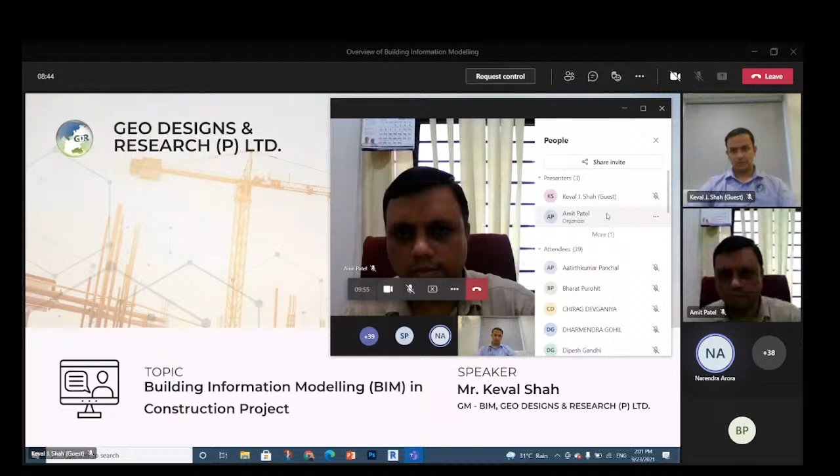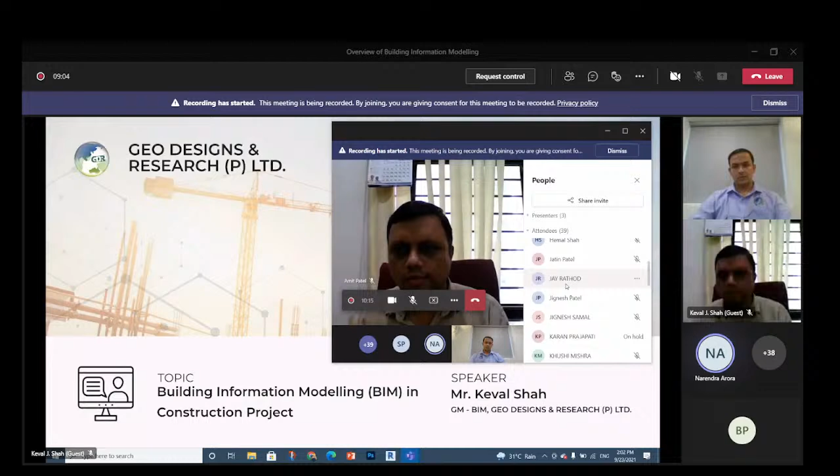This particular branch, building information modelling, is a newer branch. We hardly study it in our course, but it is being implemented in the field. In this world of computers, it is important to control the system using software. Till now we were making software to come out with the outcome and work on it, whereas now it will be more on computer working itself, that we are not supposed to take output, but we simply feed input, and then the computer will carry out its own work. This will definitely be an eye-opener for many of our students. They must understand what BIM is. BIM is basically divided into... earlier it was more related to certain activities, now it is being applied even during construction activities also. More about this will be talked about by the expert, and I hand over this to him.

Please continue, please. Thank you, Arora sir, for giving me this opportunity. Yes Keval, please, to give this knowledge of disruptive technology.

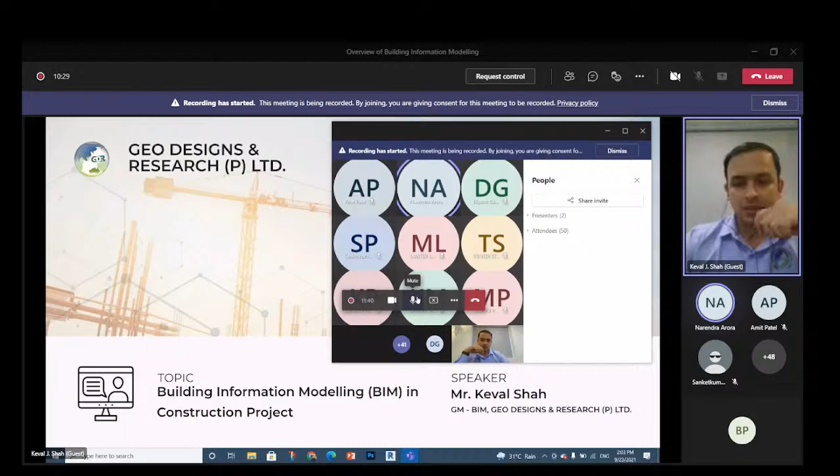See, this technology is called disruptive technology, and the meaning of... Keval, you need to be a bit loud, you need to keep your microphone closer to your face. Is it audible now? Now it's okay, it's okay.

This technology is called disruptive technology. I hope you can see the screen. What is the meaning of disruptive? A disruptive technology is a technology in which the previous technology will get vanished or disrupted. So what is something special inside this type of technology that we're going to see, study, and analyze in very simple language? There will be no heavy vocabulary or dictionary words thrown by an expert, but this will be much more of a discussion where you 40 plus students and your faculty could directly interact with me. If you have any doubts or queries, you can post them to me after the lecture or during the lecture. So let us start with what is BIM, and let us see some background of it.

Yes, the future has arrived and software is eating the world. How can we say that software is eating the world? Let us take an example of the biggest hotel chain. Is it a hotel? No, it's not a hotel, but it's a software company, that is Airbnb. If you see an example of the biggest taxi company, no, it's not a driver, they are not drivers, they are software manufacturers. Same way, we have many examples available nowadays in which software is running the world. So now the same thing is coming up in our field.

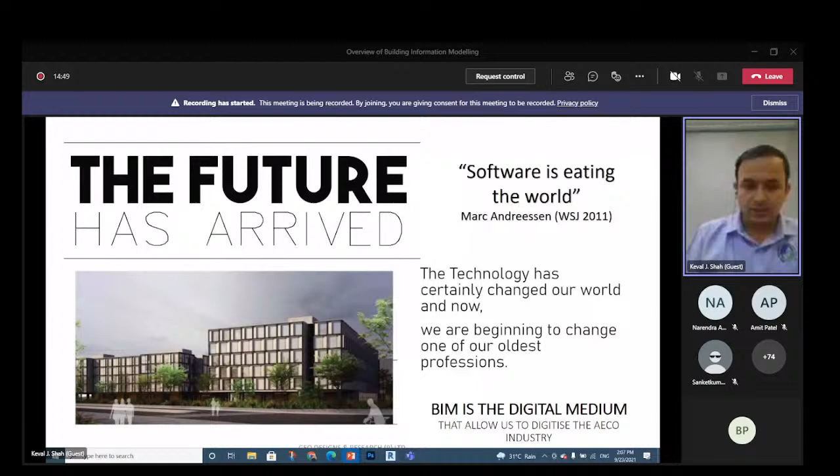Let's go ahead. What are the challenges in large construction, and why am I talking about only large construction? BIM is mostly useful for large construction - but this is again a myth. We can definitely use this for smaller projects also. There's a huge myth that BIM is useful only for larger projects, but that's not true. BIM can be useful for all types of projects, but the benefits from BIM will be larger for large scale projects.

So let us consider a stadium or large construction. What happens here? These projects are technologically complex and logistically demanding. How? Technologically complex means we now have different collaborators all around the world. Suppose the structure design is from India, the architect is somewhere from London, the MEP consultant is from a local party, and the project is going on somewhere in South Africa. It's very difficult to get everyone on one table.

And the climates - now climates are much more undulating, fluctuating up and down, so we require more mechanical thrust to maintain the temperature inside the building. These things are making buildings technologically complex and logistically demanding.

Also, our project schedules are getting shorter day by day. Suppose construction that we built 10 or 20 years back required 6 years - now it only requires 2 to 3 years, because the market is so volatile. Steel rate and cement rate today may not be the same after 1 week or 1 year. So now our project schedules are reducing day by day.

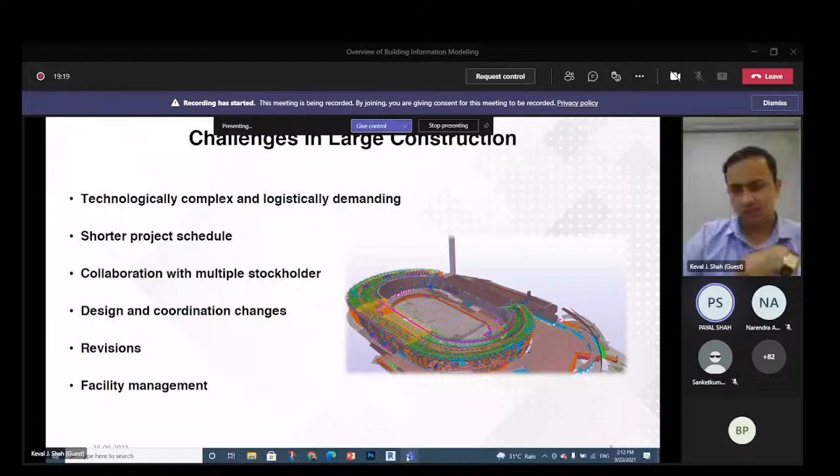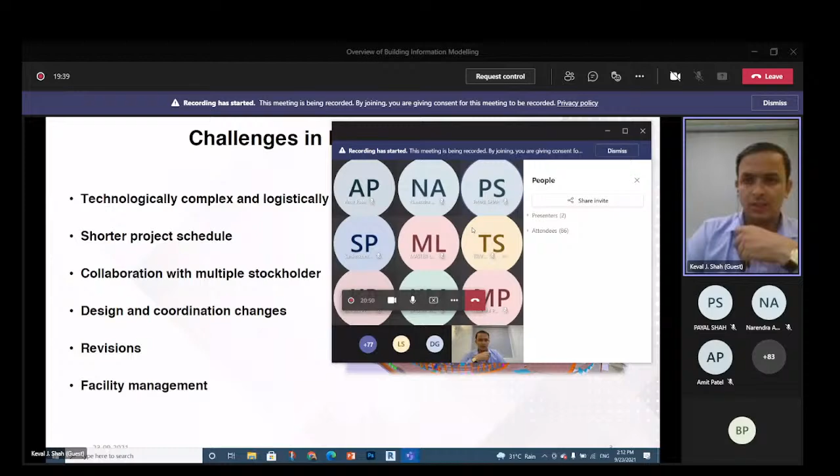So let us go forward. Am I audible again? Yes sir, audible. Yes sir.

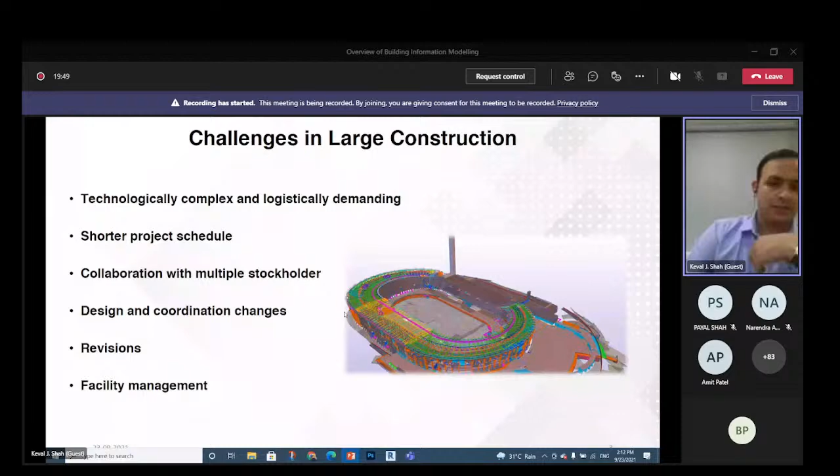So this is one of our projects that we have done, and this is our model. It's a G+12 structure, and we have done structural analysis, structural design, architectural part, green building part, MEP consultancy. We are the MEP consultant and the BIM consultant also.

If you see BIM, building information modeling and building information management are two different things. The building model has to play a shorter part, whereas the information inside it has to play a larger part. Why? Because creating a building model is very easy, but having information inside it, an information-enriched model, that information has value.

We have ISO 19650, with part 1 and part 2, for deliverables of information. The work has been done by the contractor, the EPC contractor. Now each and every asset—when I say asset, suppose you have a pump installed inside your building—when you are handing over the project to the client, we need to give each and every piece of information. I have just given one simple example of a pump.

So what type of information will be required by the client to run the project? Suppose there is a pump, we require the manufacturer, the date of purchase, invoice number, the price, and the maintenance criteria. Suppose we need to align the coupling or something every 3 months. These are called facility management parameters that we have to exchange between both parties.

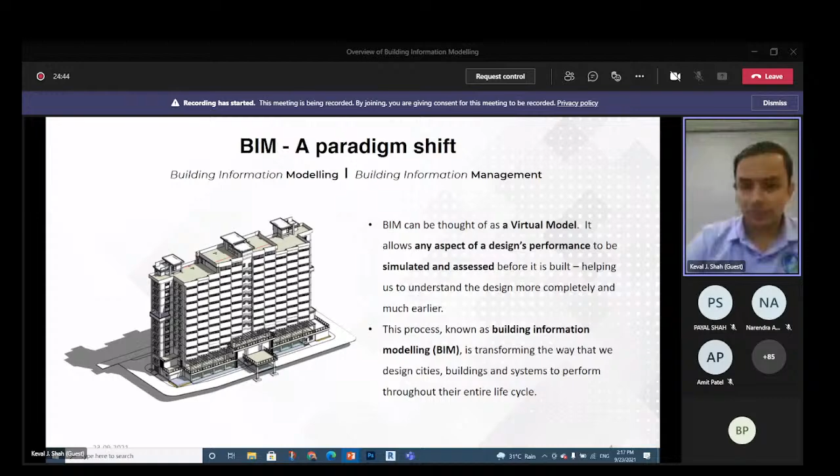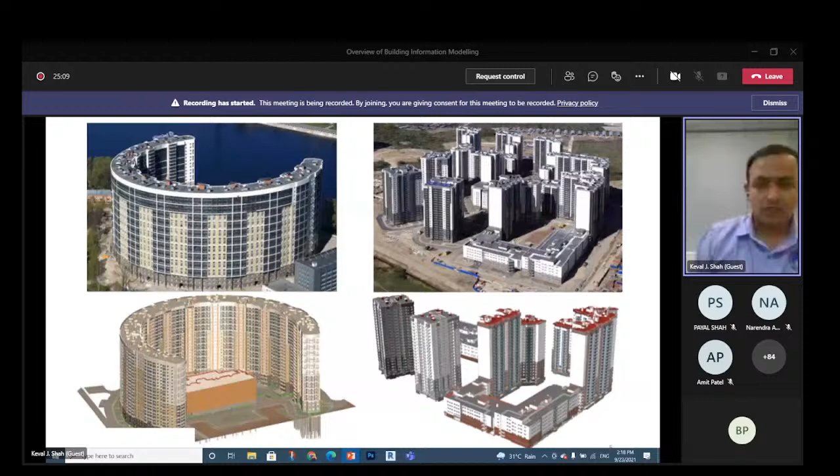This is really an intelligent model. Why intelligent model? Let us design, build, and operate. What I mean by BIM in design is that we create 3 different types of models - one structural model, one architectural model, one MEP model - and these models are clubbed together. Clashes will be removed at a very early stage.

And one of the most important parts - documents. It means our schedule, our quantities. Everything will be extracted from a BIM model. We are not going to create them separately.

I will show you many examples in which I have not even drawn one single line, but I have created just a model. Once the model is finalized by all the parties - structure designer, MEP designer - if everyone is okay with the design, after that we take out the documents.

So what's the difference between the current design process and the BIM design process? We're going to see that next. The same drawings, or the same model, will be useful in build.

When I say fabrication, it means what? Suppose the pipe I've shown in the BIM model is 100 meters or 100 feet long, but in actual we don't find a 100 feet long pipe. So we need to use the actual dimensions of a product. We can replace our model with an LOD 300 model, or a model with the actual asset available in the market. So what happens - we are doing digital fabrication.

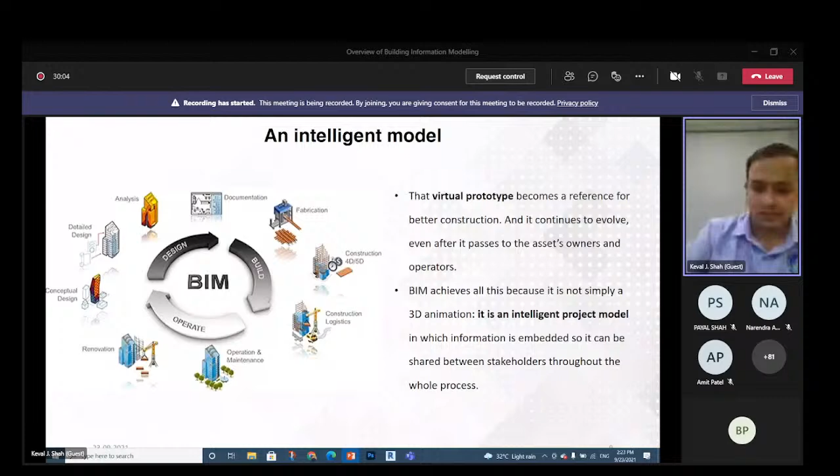So in the BIM design process, as a disruptive technology, the first model you can say is a massing model or conceptual model. What it shows is whenever we are going with any architect, they used to sketch. Suppose you are giving your vision to the architect, what they do is give some type of shape to your imagination or vision. So that part is also now possible inside this type of model. That is called a conceptual massing model.

And the important part is that in the same model you can do your detailing part, so it becomes our architectural model. Currently what happens is once the architect draws, after that a 3D artist will work in SketchUp, provided and developed by Trimble, Tekla.

What happens in SketchUp? They used to sketch it and give some virtual shape. And that virtual shape will be used by a draftsman to create a floor plan, elevation and section. So what happens is your model is going to pass through 2 to 3 hands, 2 to 3 tables. What happens is your actual geometry and your final geometry will not be consistent. There will be some errors.

So what happens here, in the same model, once you model it and the same model is given to the architect, in the same model you will provide your detailing. So what happens is your geometry will remain consistent, and you can take out the analytical model from this type of BIM model.

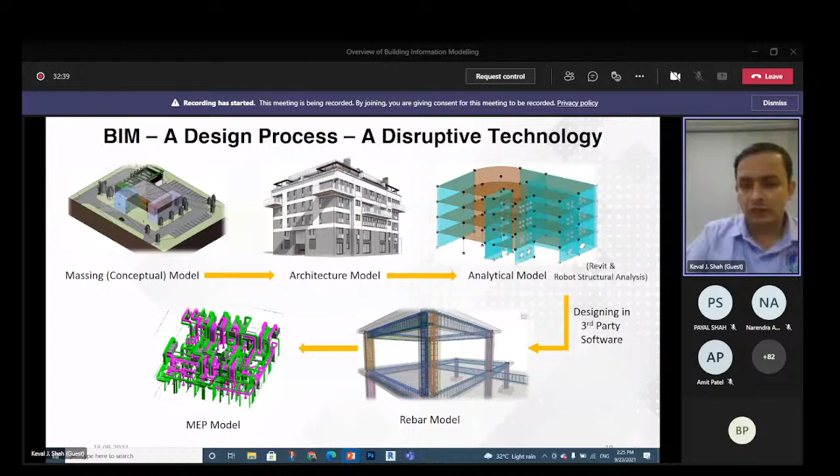Integrated project delivery is a very important part to study. We will look at what happens currently in ordinary design process versus BIM design process, so you understand how buildings are designed now and how BIM design can happen.

First of all, we need to understand what is integrated project delivery. Integrating whom? We are integrating people, integrating systems, integrating business structure and practices. We are bringing the whole ecosystem to one place.

Let us take an ordinary design process. The whole project starts from the architect. In the market, based on how building designs happen, the architect has created a certain number of drawings - elevation, section, plan, everything is created. 3D views are created, but not in BIM, just an ordinary model.

The architect sends all the drawings to the structure designer. So what does the structure designer do? They put column and beam locations, finalize them with the architect, and after that they design the building. Then the structure designer gives that drawing to MEP.

So let us say the architect has created 50 drawings, structure has created 50 drawings, MEP is going to create some 20-30 drawings. All the drawings are created, ready the same way for other consultants, and they are ready with the quantity estimation and all that part.

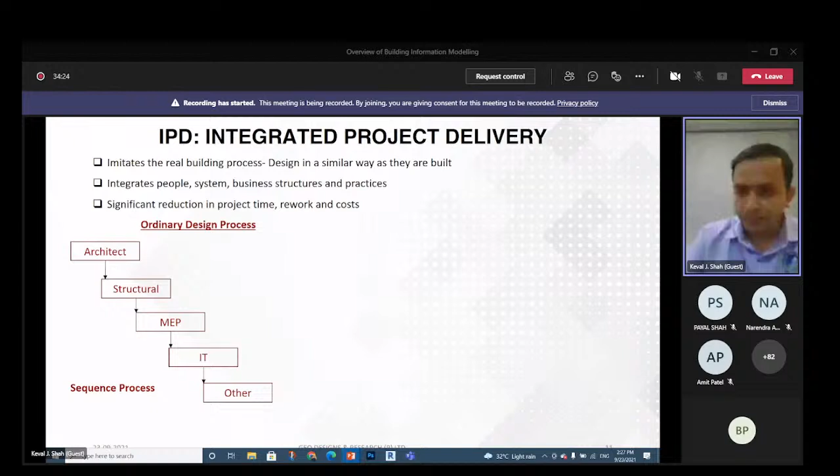And what happens? There is one revision that came. Revision, as I said, is a part and parcel of the project. There will always be revisions. No project should be created without any kind of revisions.

If one revision comes, that revision will affect all the drawings and views placed on those drawings - all 50 drawings from architect, all 50 drawings from structure designer, and MEP consultant has to change the drawing. If room sizes are changing, they have to change the design also. So everything is changing. This is called a sequence process.

So what happens in BIM? Nowadays architects are providing directly a BIM model. So what is the summary of the ordinary design process? It's a sequence process, it's a long process. Each and every one is located in different offices, and there is a cost of rework - they have to revise the drawings again and again. Suppose the plan is changed, they have to change that.

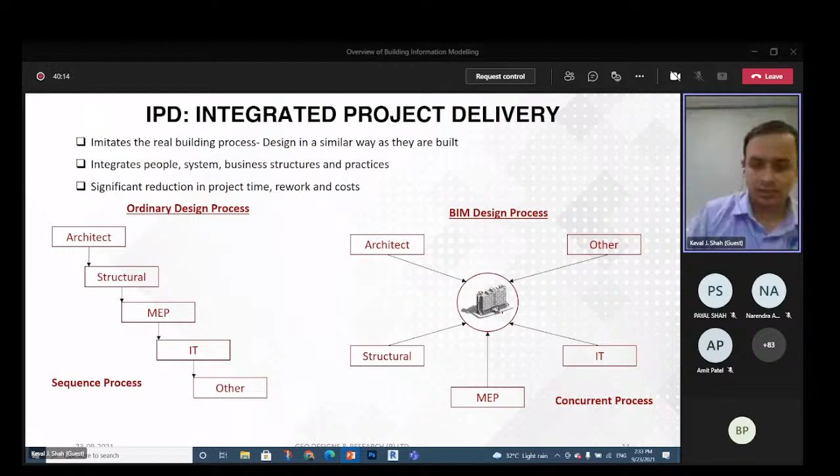Okay, same way for structural column, architectural wall. So if a BIM model is sent to the site, there are some ways by which we can totally go to a paperless site. Paperless site means there will be no drawings printed - I am saying the highest level of BIM use. So if the BIM model is sent to site, inside it there are drawings, schedules, area plans, and all the views.

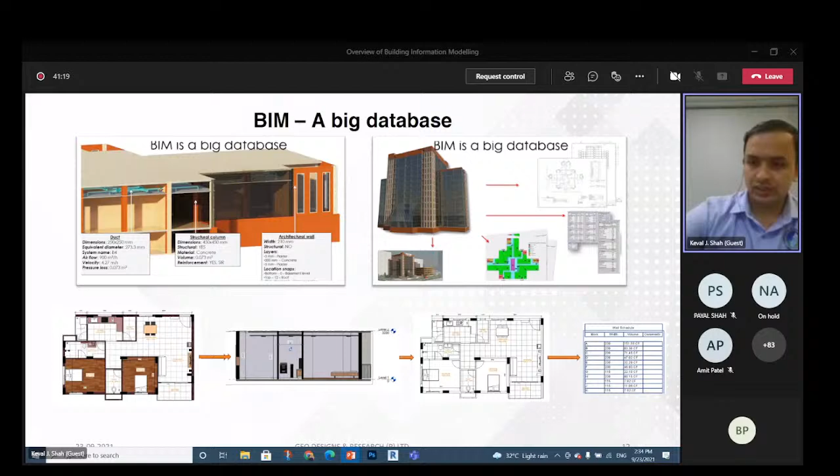Okay, and these are so dynamic. Suppose one wall is changed - elevation, section, plan, everything will be changed, and your schedule, your quantity will also change. Everything is connected, and we have a new revised estimation ready. Okay, so the analysis we have made, this is really important to study.

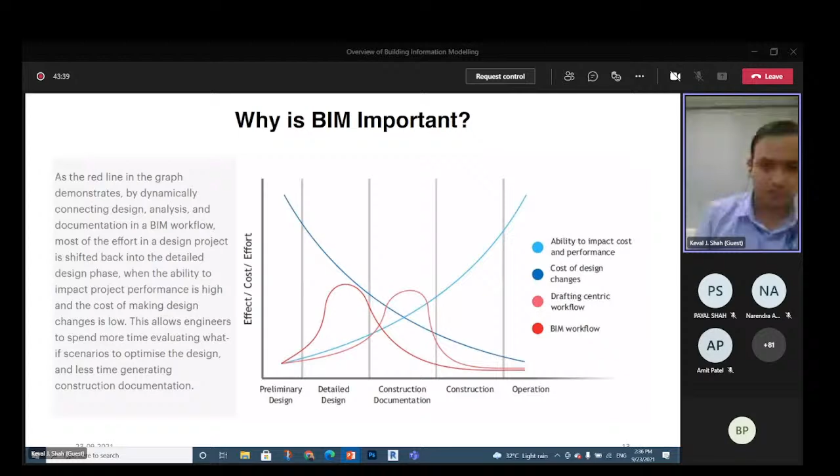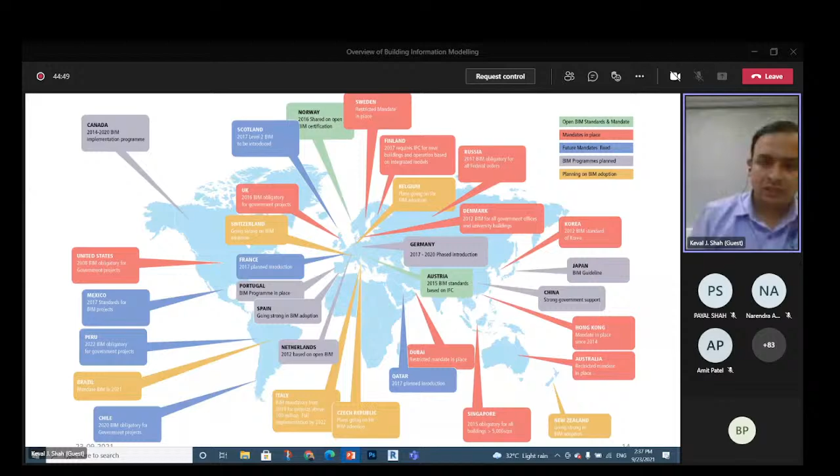And even in our India, in Dholera, we have mandated this. So what happens is finally we have to give this type of data-rich BIM model to the client to run the project. So these are the places where BIM has opportunity, and you may not find BIM in India, but as someone said it's a BIM factory, because their models are created in India.

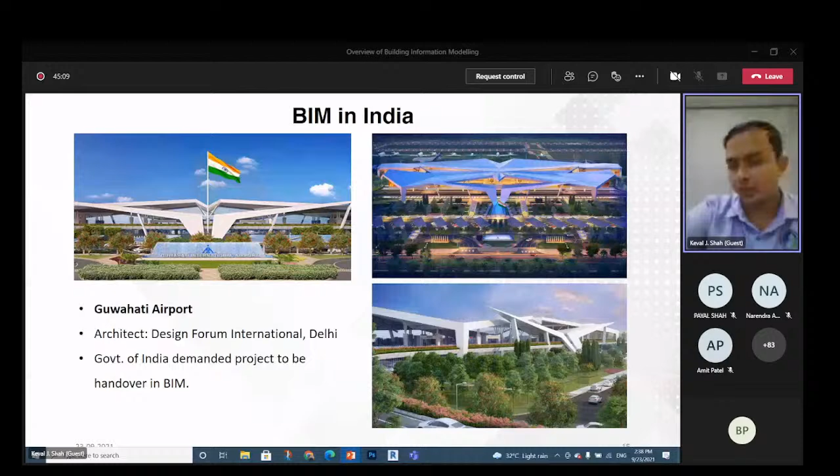BIM in India - Guwahati Airport is the first airport which was designed, constructed, and will be maintained based on BIM. After that, India demanded 100 more airports coming, which will be totally based on BIM. So BIM definitely has a future, and another nice example is Bangalore Airport, which was designed in just 6 months and delivered in 6 months.

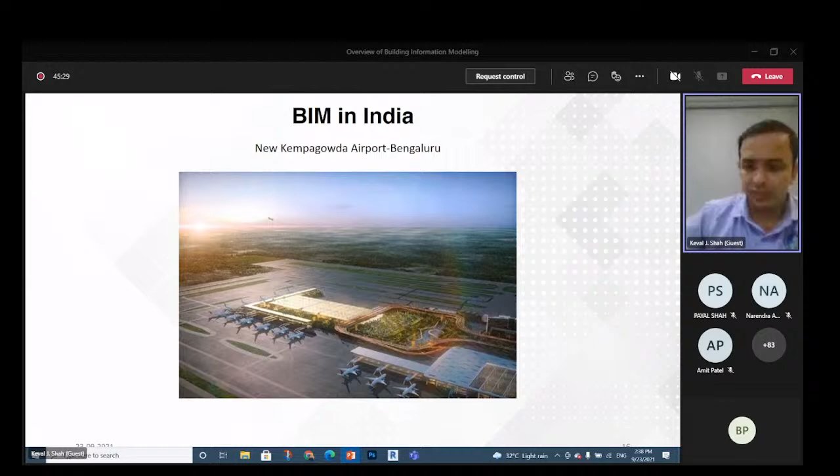The design was completed within just 6 months. Even our house designs don't get completed in 6 months. So they have designed this within 6 months, and delivered the whole document to the client in 6 months.

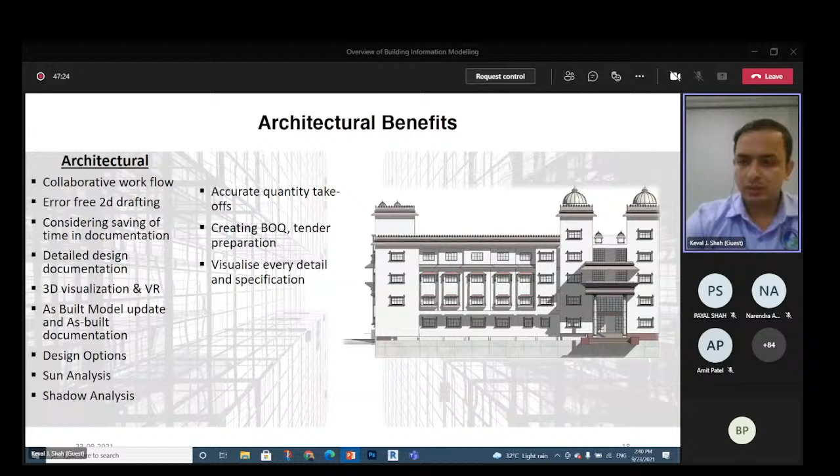Accurate quantity takeoff - as you keep building the model, drawings keep getting created along with quantities on the side. What you have to do is just modify something here and there, and your final BOQ - bill of quantity - will be ready. This helps in tender preparation, and you can visualize every detail and specification in 3D. That is structural benefit, where you can see accurate design intent BIM models can be created.

ઘણી બધી જગ્યાએ ફ્યુચરમાં એવું થતું હોય છે કે રીબારિંગ કરવું પડે, that you will come to know that part to be avoided. RCC અને સ્ટીલ 3D મોડેલિંગ પણ પોસિબલ છે. 3D મોડલ લોકો ઇન્ફ્રાસ્ટ્રક્ચર પ્રોજેક્ટમાં તો બધા બનાવતા જ હોય છે, બટ નાઉઅડેઝ ઇટ ઇઝ પોસિબલ કે આપણે ઇઝીલી આપણા બિલ્ડિંગ પ્રોજેક્ટમાં પણ વાપરી શકીએ.

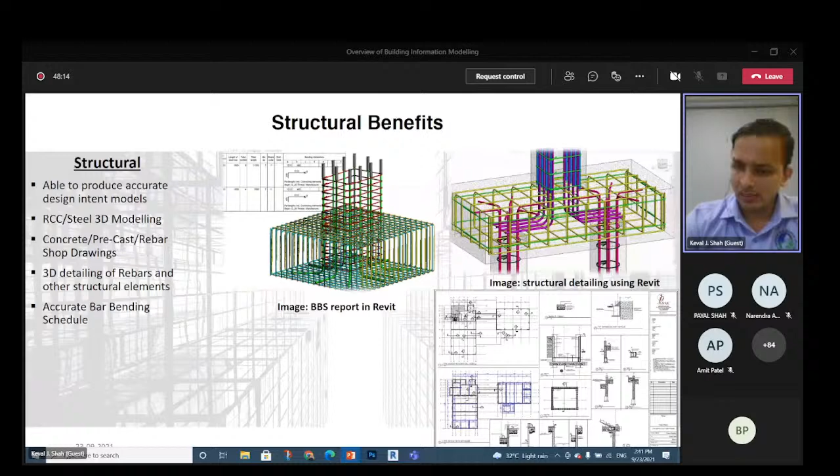કોન્ક્રીટ પ્રીકાસ્ટ એન્ડ રિબાર શોપ ડ્રોઈંગ્સ, જે તમે અહીંયા એક એક્ઝામ્પલ જોવો છો, ઇટ્સ શોપ ડ્રોઈંગ્સ. આપણે આ ડ્રોઈંગ જે છે અહીંયા તમે જોવો છો મેં CAD પર નથી બનાવ્યું, ઇટ ઇઝ એક્સટ્રેક્ટેડ ફ્રોમ BIM મોડલ. ઓકે, અને એક્યુરેટ બાર બેન્ડિંગ શેડ્યુલ બરાબર. જનરલી બાર બેન્ડિંગ શેડ્યુલ બનાવવા માટે કોન્ટ્રાક્ટર તરફથી સાઇટ પર એક પર્ટિક્યુલર વ્યક્તિ હોય છે જે આને બાર બેન્ડિંગ શેડ્યુલ બનાવે, બટ હવે એની જરૂર નહીં પડે. ઓકે, સો યુ કેન ક્રિએટ અ BBS, યુ કેન ડિઝાઇન, યુ કેન ડોક્યુમેન્ટ, યુ કેન ટેક આઉટ ધ ક્વોન્ટિટીઝ ઓલ્સો.

MEP બેનિફિટ્સ. MEP માટે સૌથી વધારે મોટા બેનિફિટ છે કેમ કે એ લોકો આ પ્લેટફોર્મનો યુઝ કરીને 3D માં પ્લાનિંગ એ કરી શકે છે કે મારું એક એક ડક્ટ જે છે HVAC નો ક્યાંથી જશે, એક એક ફાયર ફાઇટિંગની લાઇન ક્યાંથી જશે, એક એક મારે પાઇપલાઇન ક્યાંથી જશે. ઓકે, એન્ડ બેઝડ ઓન ધેટ દે કેન પ્રોવાઇડ અ ડિઝાઇન. ક્લેશ ડિટેક્શન થઈ શકે છે.

હું તમને થોડુંક બતાવું છું કે અત્યારની ડિલિવરી કઈ ટાઈપની હોય છે, એટલે અત્યારે સાઇટ ઉપર કેવું આપણે ડિઝાઇન મોકલી છે અને યુઝિંગ ધીસ ટાઈપ ઓફ BIM ટેકનોલોજી આપણે કેવી ટાઈપ ડિઝાઇન મોકલી શકીએ છીએ.

ક્વોન્ટિટી ટેકઓફ એન્ડ એસ્ટિમેટિંગ. આપણને નહીં ખબર કે પાઇપની ટોટલ લેન્થ કાઢવી હોય એકવાર બિલ્ડિંગ બની ગયા પછી ઇમ્પોસિબલ છે, તમે ન જોઈ શકો. કેટલો તમે ઓર્ડર કર્યો છે એના ઉપરથી તમે એની ક્વોન્ટિટી કાઢી શકો, બાકી ના કાઢી શકો. બટ નાવ ઇટ ઇઝ પોસિબલ કે તમે એક એક કેટલા એલ્બર, કેટલું ટી, કેટલા બધા લાગ્યા છે that you can actually take out. સ્મોલ બેનિફિટ છે બટ યસ ઇટ ઇઝ અ બેનિફિટ.

કન્સ્ટ્રક્ટેબિલિટી ઇવેલ્યુએશન. કન્સ્ટ્રક્ટેબિલિટી ઇવેલ્યુએશન એટલે મારો કઈ જગ્યાએ મારો બોલ વાલ્વ લાગશે, કઈ જગ્યાએ મારો XY લાગશે, X વાલ્વ લાગશે, Y વાલ્વ લાગશે, અકોર્ડિંગ ટુ વેધર ઇટ ઇઝ એપ્રોચેબલ ઓર નોટ. બરાબર, આ બધી મેન્ટેનન્સ ઓછું કરવા માટેની વાત છે.

કન્સ્ટ્રક્શન સિક્વન્સિંગ. બરાબર, ઘણી વાર એવું થતું હોય છે કે ફોલ સીલિંગ બંધ કરી નાખી પણ પછી ખબર પડી કે આપણે એક પાઇપલાઇન કાઢવાની બાકી રહી ગઈ છે, તો શું થાય કે આપણે પાછી ફોલ સીલિંગ તોડવી પડે. આફ્ટર ધેટ યુ રન યોર પાઇપલાઇન એન્ડ આફ્ટર ધેટ યુ અગેન, સો ધીસ ઇઝ અ રીવર્ક. સો ધેટ રીવર્ક કુડ બી રિડ્યુસ. તો કન્સ્ટ્રક્શન સિક્વન્સિંગ કેવી રીતે કોણ કામ કરશે પહેલા, ધેટ કુડ બી ડિસાઇડેડ. ક્રિએટિંગ ક્લેશ ફ્રી ડોક્યુમેન્ટ્સ ઇઝીલી એન્ડ ફાસ્ટર.

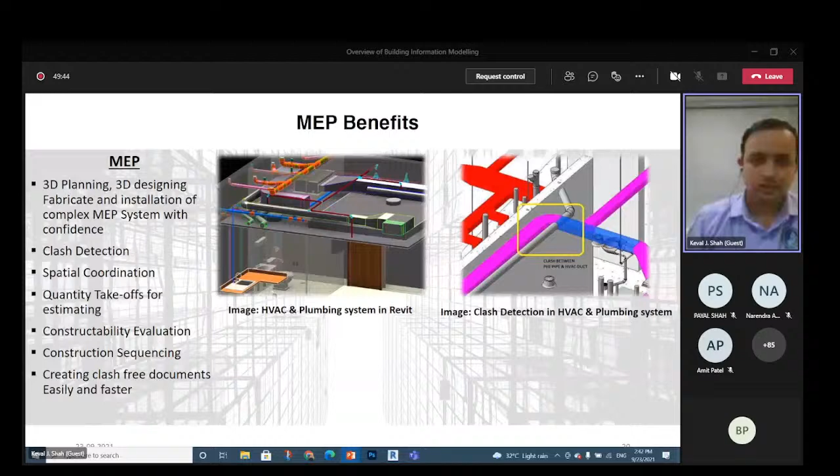And everything clubs together it becomes something like this. So value of BIM for owners, if you say problems જે owners ને સૌથી વધારે થઈ રહ્યા છે અત્યારે, 60% મેજર કેપિટલ કોસ્ટ પ્રોગ્રામ્સ ફેલ ટુ મીટ કોસ્ટ એન્ડ શેડ્યુલ ટાર્ગેટ્સ. કોઈ દિવસ કોઈ આપણા પ્રોજેક્ટ ટાઈમ પર પતતા નથી. ઓકે, અને આપણા એસ્ટિમેટમાં કે આપણે જે કોસ્ટ ડિસાઇડ કરીએ એનામાં બજેટમાં પતતા નથી. ઓકે, સો ધેટ ઇઝ વન બિગેસ્ટ ડિસએડવાન્ટેજ.

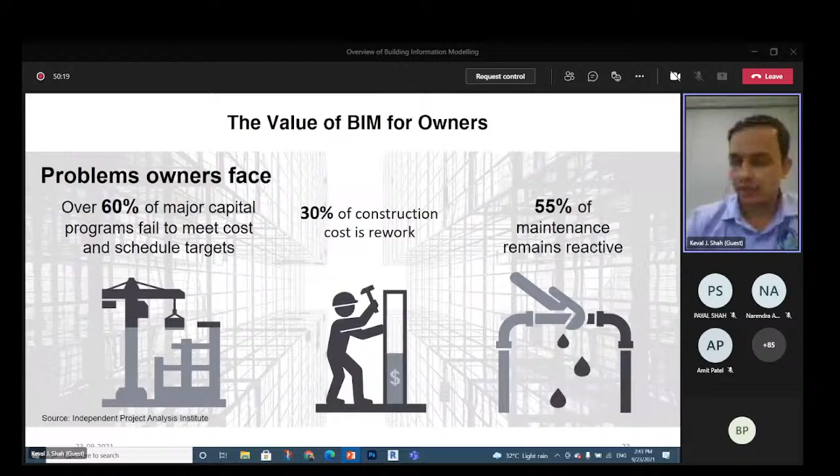30% ઓફ કન્સ્ટ્રક્શન કોસ્ટ ઇઝ રીવર્ક. ઓકે, these are the stats from Independent Project Analysis Institute. What they are saying in US, it's a 30% of construction cost is rework, 55% maintenance always remain reactive. Okay, so maintenance માટે છે, construction માટે છે, અને design માટે છે. The value of BIM for owner, they can improve the transparency, they can improve the quality of a building and efficiency of a building.

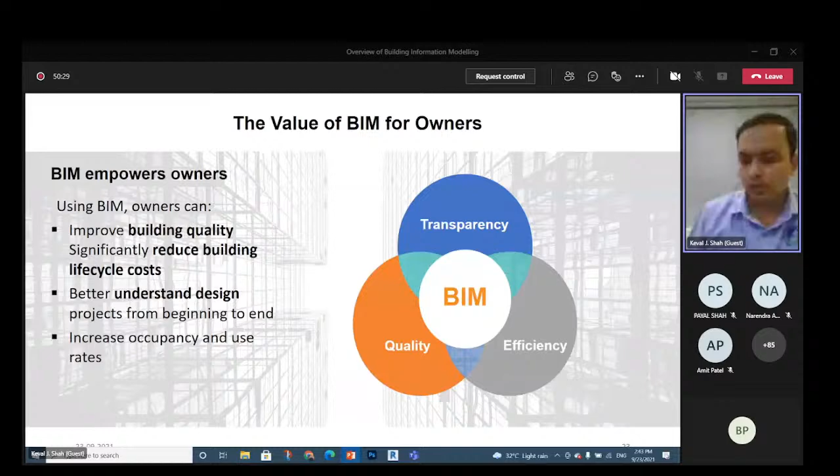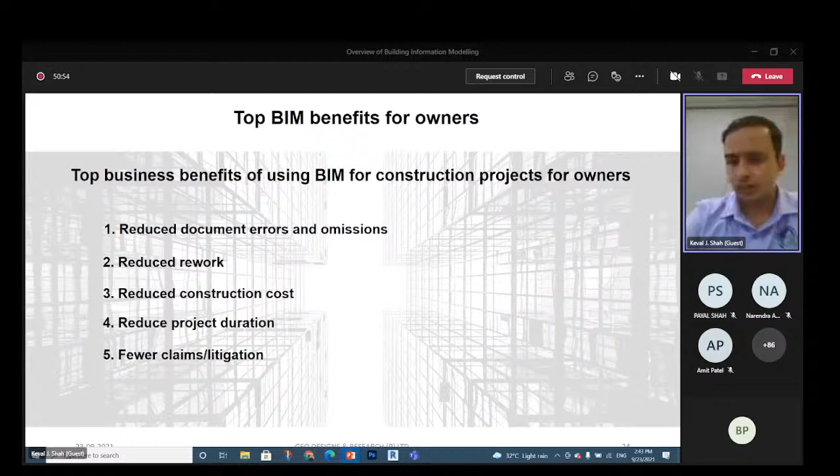Top BIM benefits for BIM owners, we can say આખું BIM apply કર્યા પછી what are the major benefits, if someone asked, when we can say reduce documental error and omission, reduce rework, reduce construction cost, project duration and fewer claims and litigation. કે કોના કારણે પ્રોજેક્ટ આગળ વધ્યો, કોના કારણે શું થયું, ડિલે કોના કારણે થાય, everything could be documented well, and that will be very fewer claims and litigations.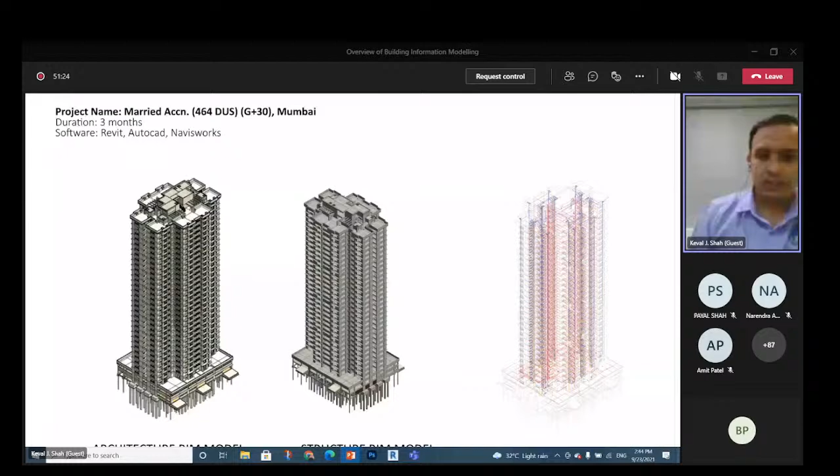So this is another one our example of BIM project we have done, the architecture structure and MEP BIM model that you can see over here. As you can see, in this, my input, as you can see input, this is the input.

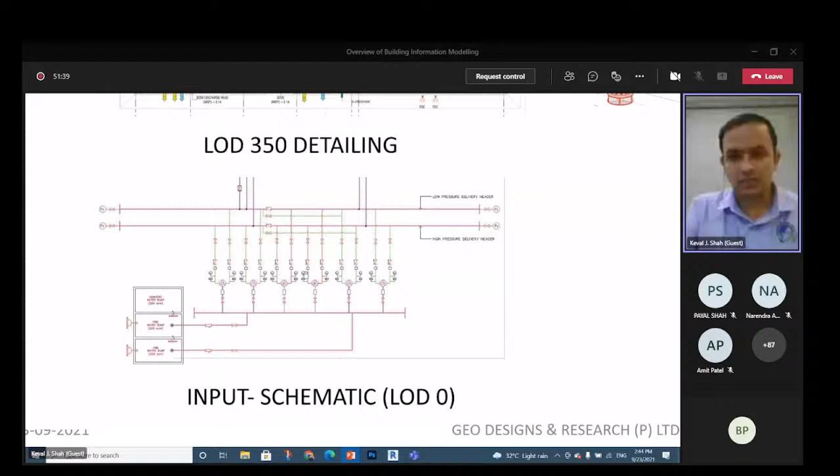Okay, this looks very nice, a very very faint and very it's documented very well, but actually it is something like that's a difference. The difference is આપણે લોકો સુધી પહોંચાડવાનો છે કે this is design, this is good for construction, but this is LOD 350 detailing is as up to as built detailing we can go. So the BIM is going from input to output, what you are seeing over here, અને મારો એક pump આપણે મલ્ટી ઓપરેશન પંપ છે જે એ જ પંપ છે જે ખરેખર ત્યાં લાગવાના છે.

તો વોટ હેપન્સ કે એની મદદથી આપણે એક્ચુઅલ પ્લાન આઉટ કરી શકીએ છીએ કે મારી સ્પેસ કેટલી રોકાય છે પંપ માટે, મારા વાલ્વ કઈ જગ્યાએ લાગશે, NRV વાલ્વ કઈ જગ્યાએ લાગશે, મારા સ્લુઇસ વાલ્વ કઈ જગ્યાએ લાગશે. એવરીથિંગ વી કેન પ્લાન અર્લિયર.

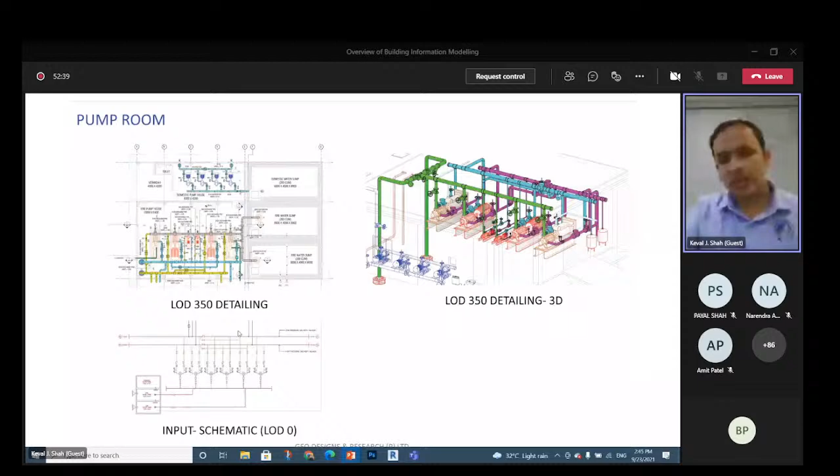સો નાઉ જે થવાનું છે એ પહેલેથી તમે જોઈ રહ્યા છો. પછી આ ડ્રોઈંગ સાઇટ ઉપર જાય, નીચેનું ઇનપુટ કે આ ડ્રોઈંગ સાઇટ ઉપર જશે તો ડેફિનેટલી વી કેન સેવ ઇન અવર

એક રેડ લાઇન તમને જોવા છે. If you see the cursor, there is no markup tool available. Okay, over here as you can see one fire duct is there, and this again looks very clean and nice, but actually it will be something like

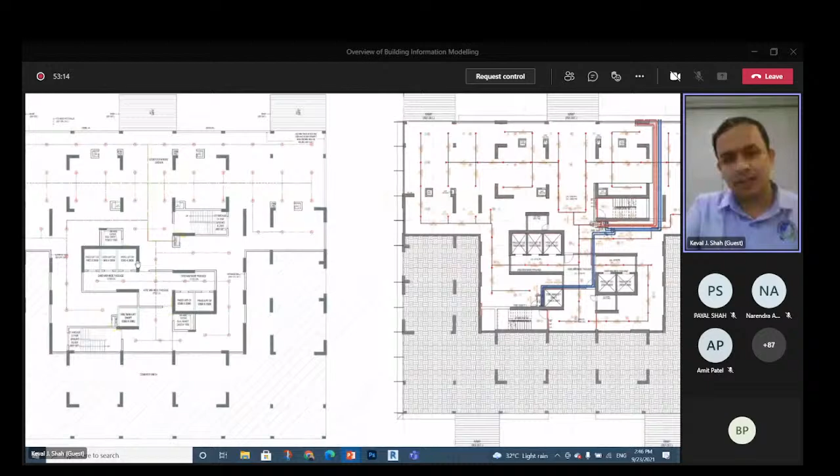There are multiple drawings you have to study before construction, before laying out of pipes. There is one architectural drawing you have to refer, structural drawing you have to refer, structure section, architectural section you have to refer, single line diagram you have to refer, and also this plan you have to refer. આટલા તો વસ્તુઓ ભેગી કરીને આપણે બનાવવું પડે છે.

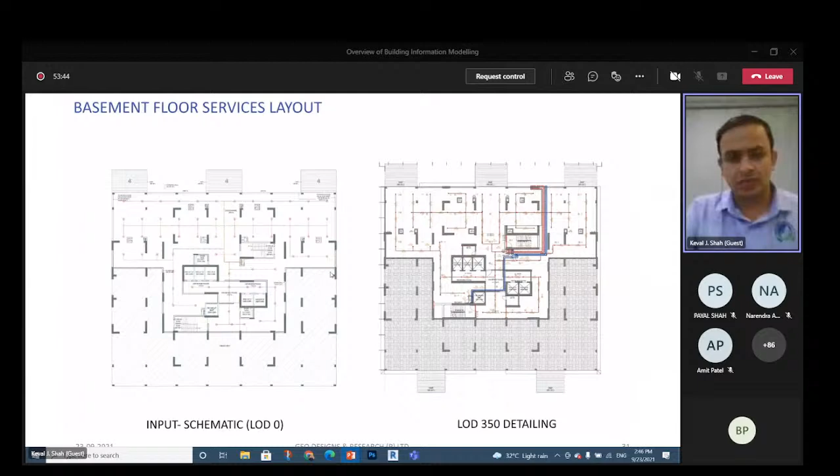ઇન્ફોર્મેટિવ કરી શકો છો. એટલે બીમ માટે એવું કહેવામાં આવે છે બીમ ઇઝ ધ સિંગલ સોર્સ ઓફ ટ્રુથ. કરન્ટલી એવું નથી, 10 ડોક્યુમેન્ટ રેફર કરો તો તમને એક સાચી વસ્તુ ખબર પડે, બટ હિયર બીમ મોડેલ ઇઝ વન સિંગલ સોર્સ ઓફ ટ્રુથ. એ સેમ વસ્તુને તમે 3D માં પણ જોઈ શકો છો.

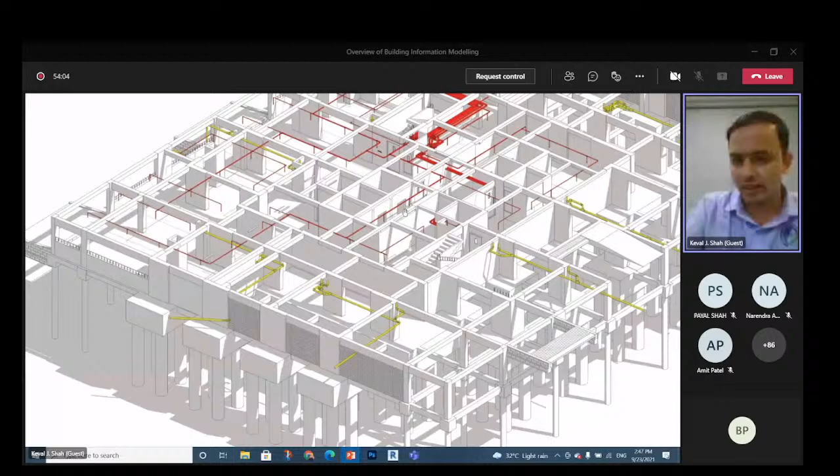Sewage lines and soil lines and waste pipe lines and firefighting lines you can plan earlier in a better way. You can plan if it is passing out of beam, you can provide a sleeve over there. So we are providing sleeve drawings also.

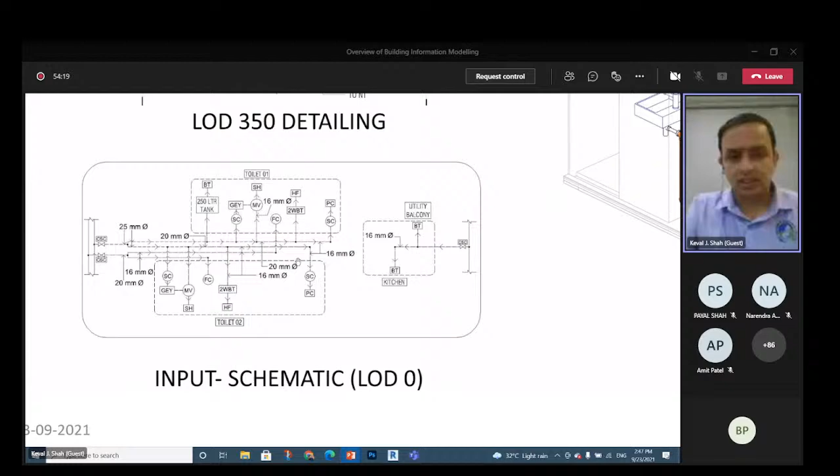Example of our domestic supply line which we are seeing, and I know drawing set looking good. ખરેખર વાસ્તવમાં જે થાય છે વસ્તુ કંઈક અલગ છે. So we are sending this type of detailed drawing now on site.

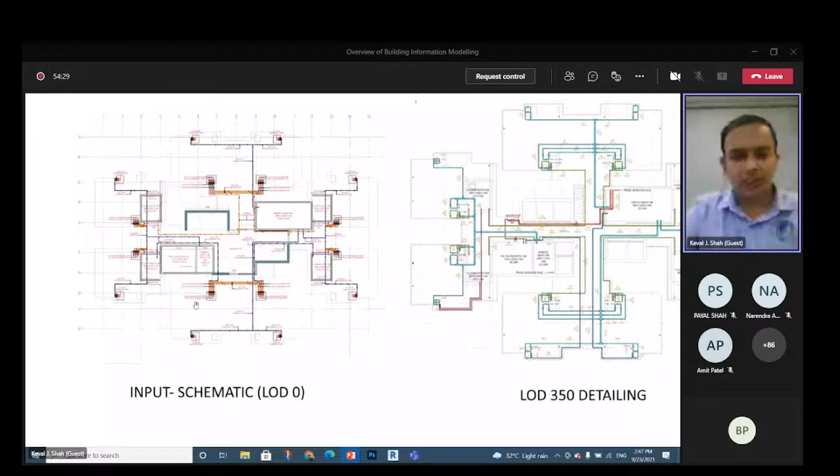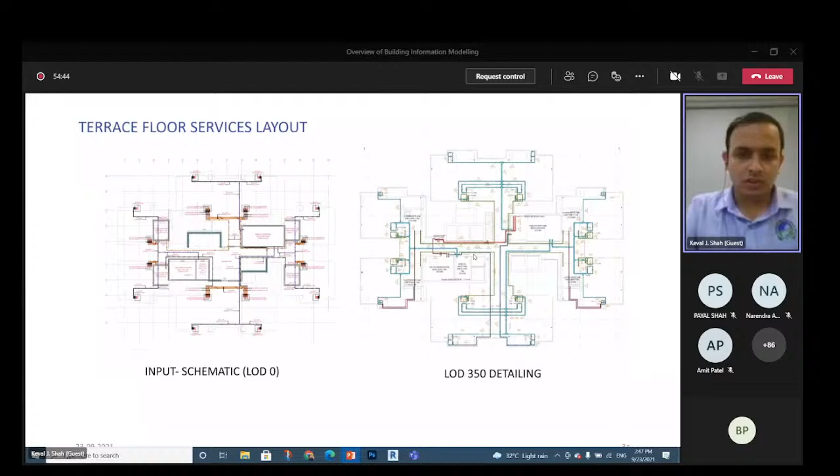This is a terrace. Terrace is always messed up with so many pipelines passing from the back of backyard or something. This is not possible actually. So there is a gap between design and actual construction.

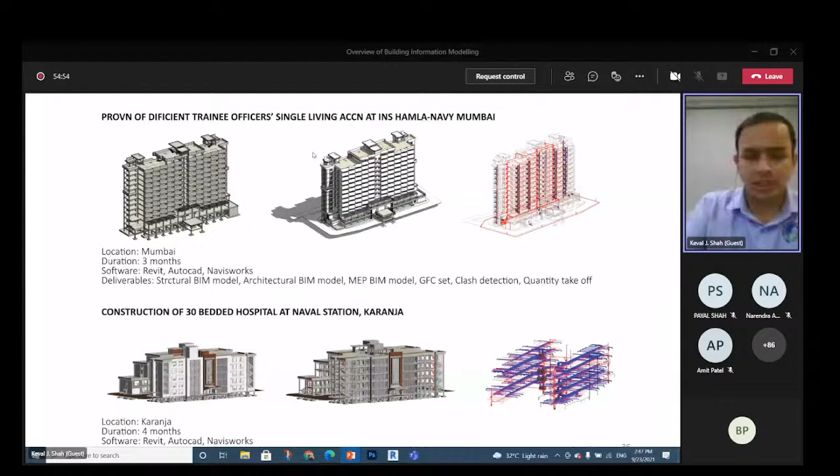The same way coordinated design project. This is again some other type of project which we have done, and this is whatever you are looking over here. This is a drawing. We have not created a single line. Everything is modeled, coordinated, clash free, and views has been extracted.

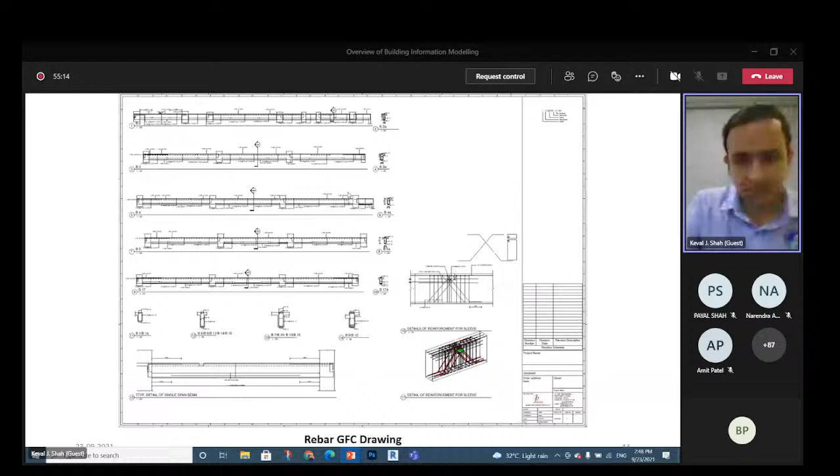Rebar reinforcement drawing is also possible. These are all created on BIM platform.

So in case of CAD, they are losing lakhs of rupees. So this is the thing they have to understand.

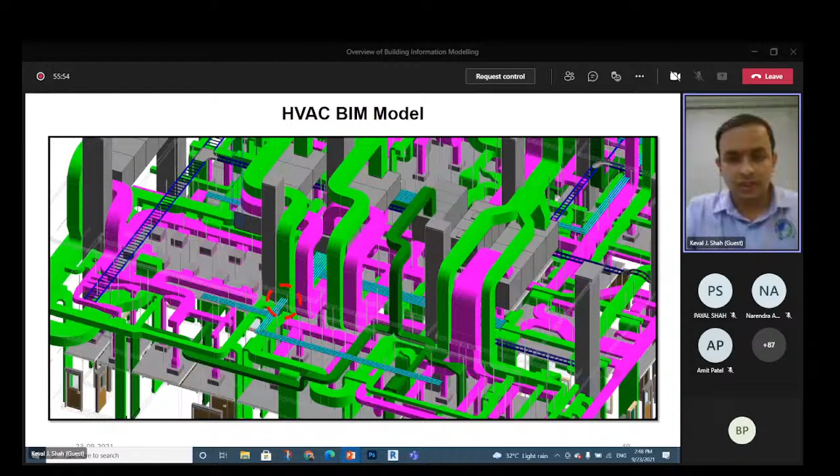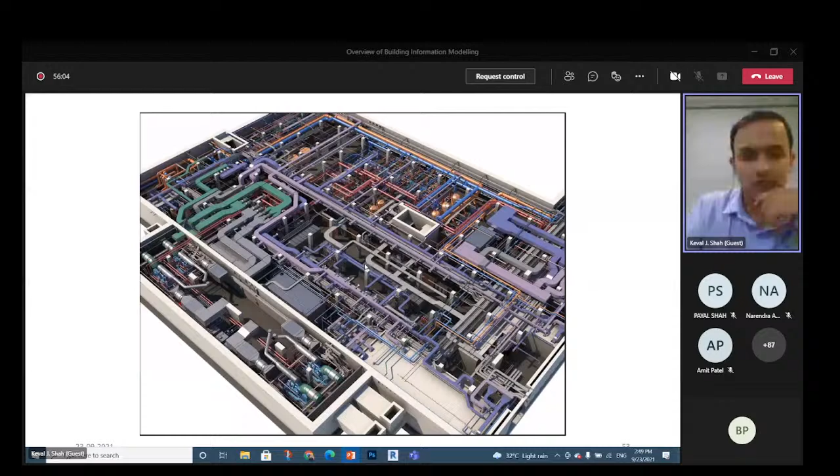This is the actual image. Also, some of the better images I have downloaded to give you a look at how actually BIM models are working in BIM profession. We can say the highest level of accuracy. And see over this, these are actually not construction. These are the BIM models, as you can see.

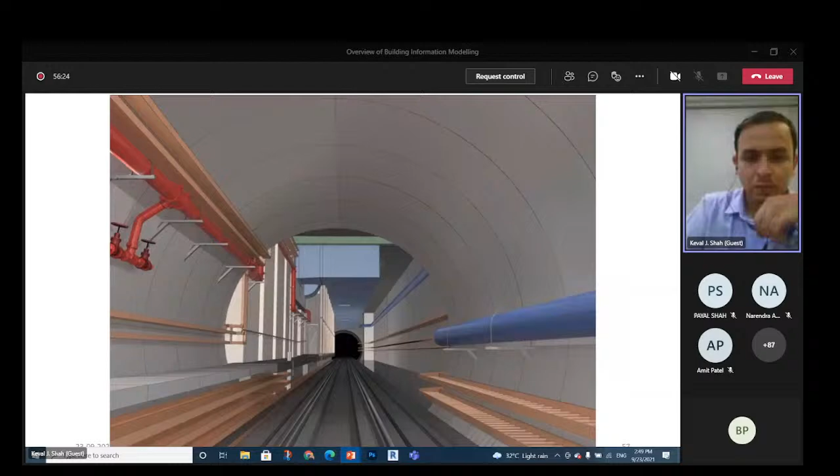Tunnel BIM is in infra also. BIM is in buildings also. Say this thing, it's a nice example. Maintenance is overdue, you have to maintain the coupling alignment every 3 months.

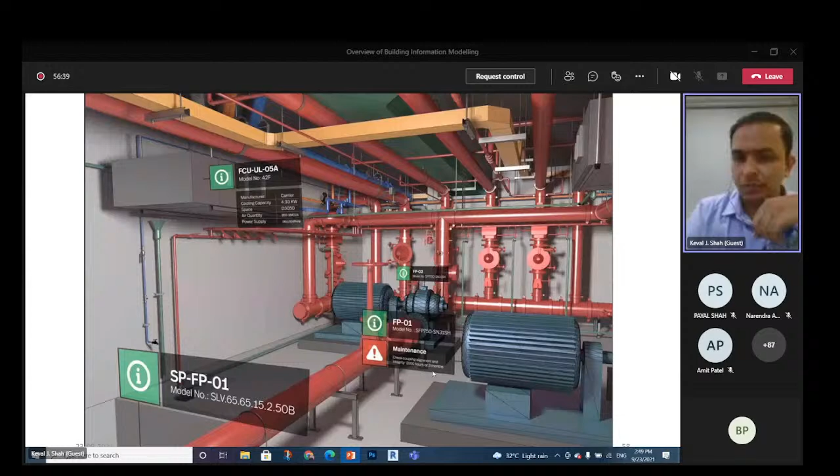This will be infographics. BIM model will tell you that you have to do this. Once BIM model tells you to do this, you will do it. Your maintenance team will operate these things. So if they are operating and maintaining the building, definitely the cost of maintenance will be less. So it's all about information.

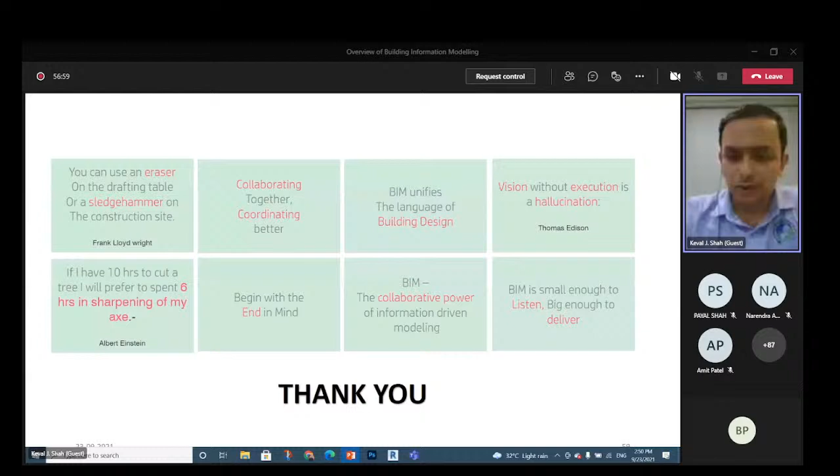So there are a few quotes we have: you can use an eraser on a drafting table or a sledgehammer on a construction site. Collaborating together and coordinating better. BIM is a unified language of building design. There are so many good quotes on BIM.

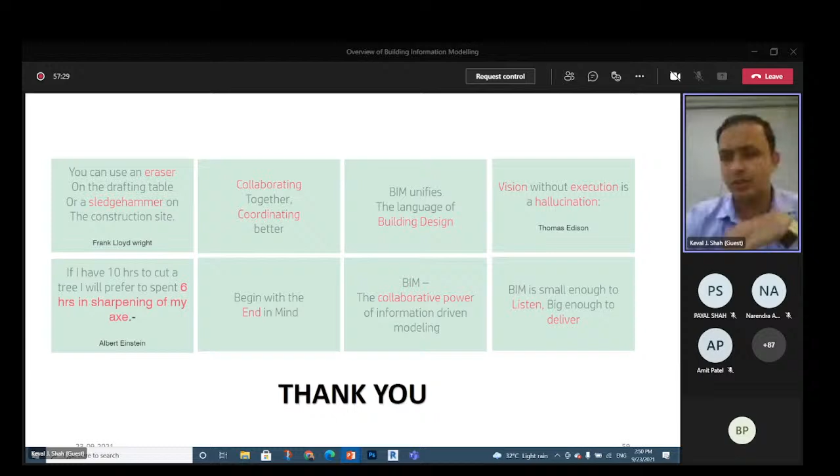Another one is told by Albert Einstein that if I have 10 hours to cut a tree, I would prefer to spend 6 hours in sharpening my axe. It's all about pre-planning. BIM karo planning ma, and you save cost and time. Thank you.

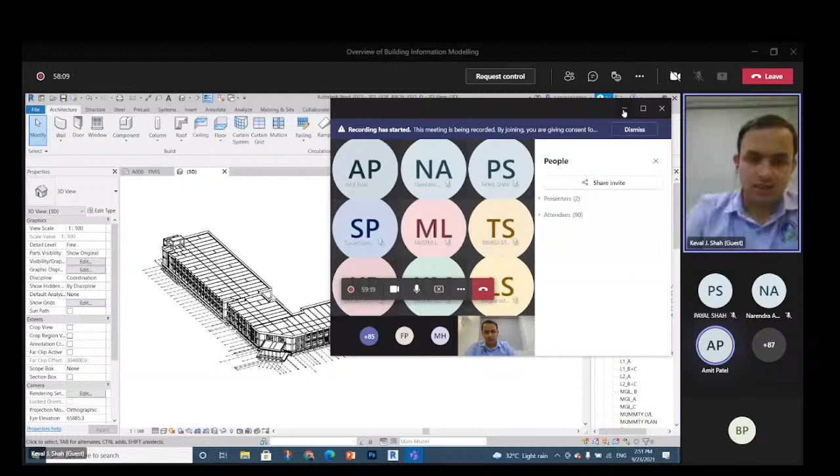If you want to see some of my BIM models, can you see the BIM model? Yes sir. Can you see the Revit screen? Yes sir. So this is our nano project.

This is another one of our projects in which we have implemented BIM, and the site over here is so undulated.

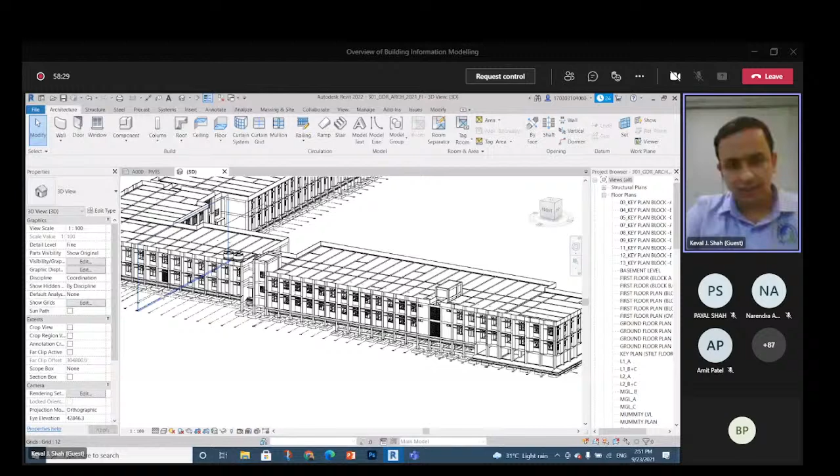The excavation depth is reducing. Like over here, we have a very low excavation depth available. Here we are going too much in depth. So in this type of level difference we are facing, we used BIM, and what happens? We have the exact location of plinth beams and ground beams we have located. This is one.

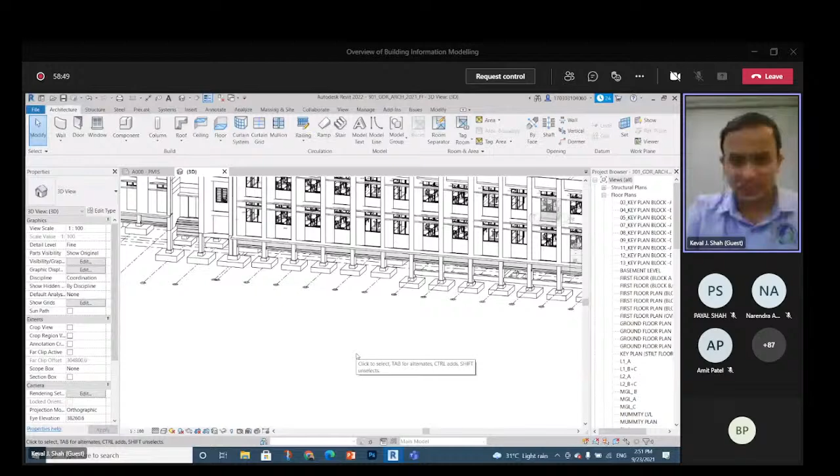If I want to show you some of my plans.

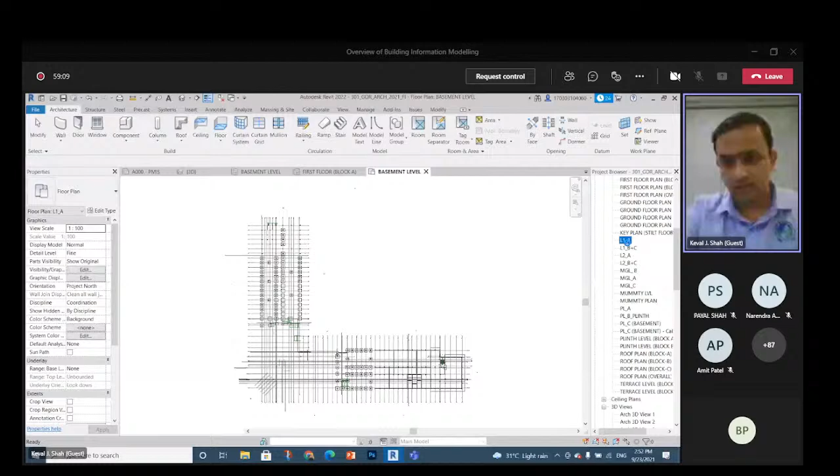As I said, I have to focus on my BIM model and software only. So what I am doing is I am taking up one section. Once this section is done, I just go to view. You have your section ready. You just have to modify this according to your need and your standards.

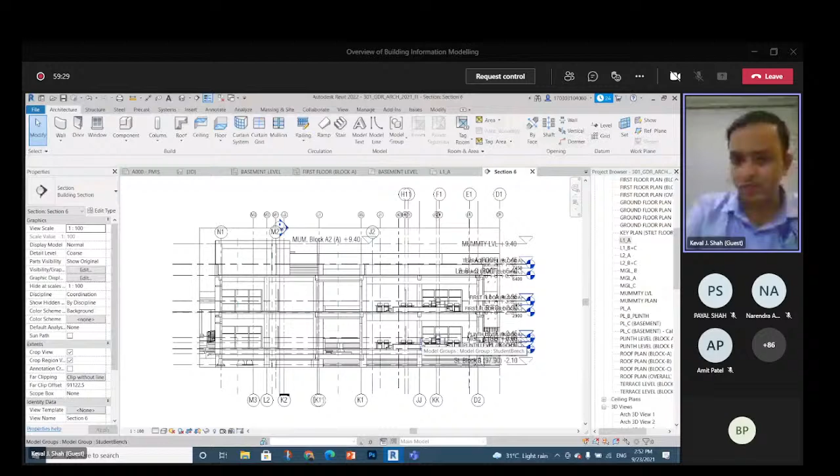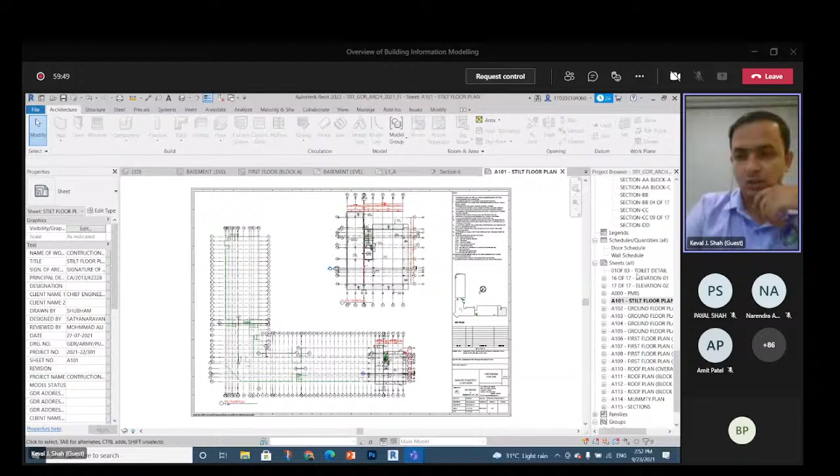You will have your drawing sheets ready. So simultaneously, as you can see, right side we have all the sheets available with us, and the same way we have all the quantities available with us. These are how we are taking out our quantities, and finally we have the total, how many walls and how many meter cube of wall bricks required could be found out easily.

So BIM model is equal to drawing plus quantities plus model plus clash free matrix.

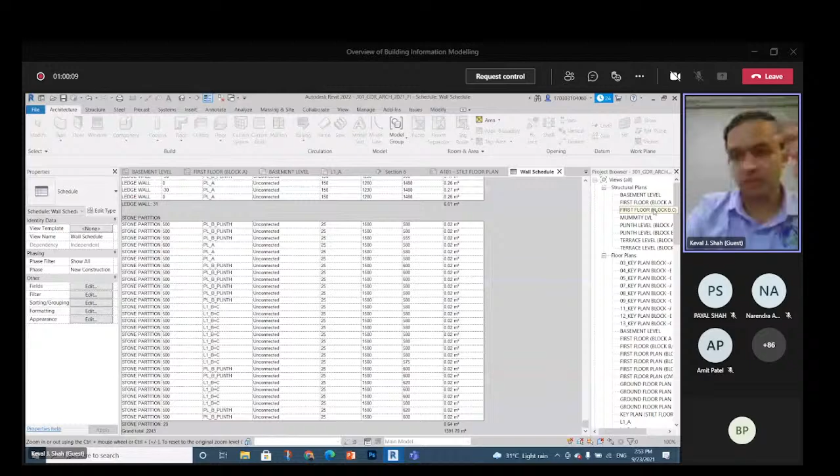You want to see some simulation on this type of project, actually.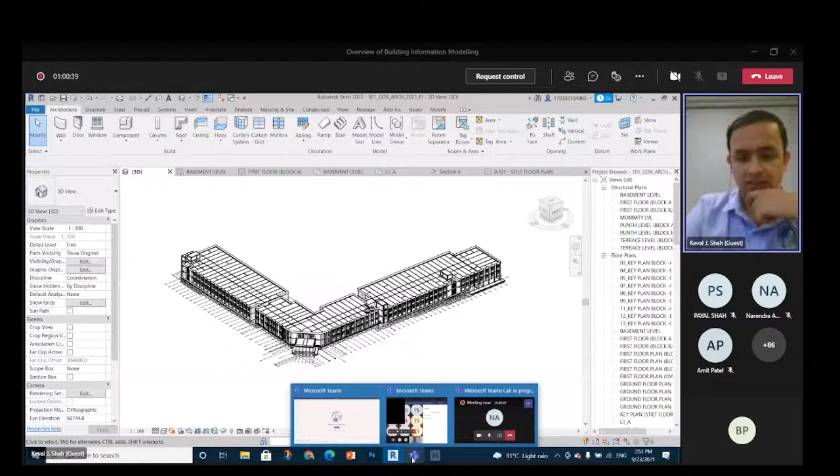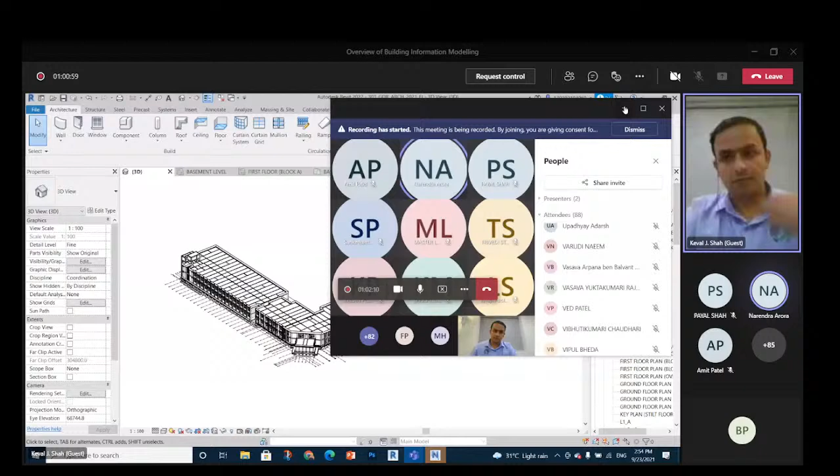Any doubts you have, we can discuss. We have 89 participants, at least I expect minimum 10 doubts, queries. Amit, anybody? Okay, thank you, sir.

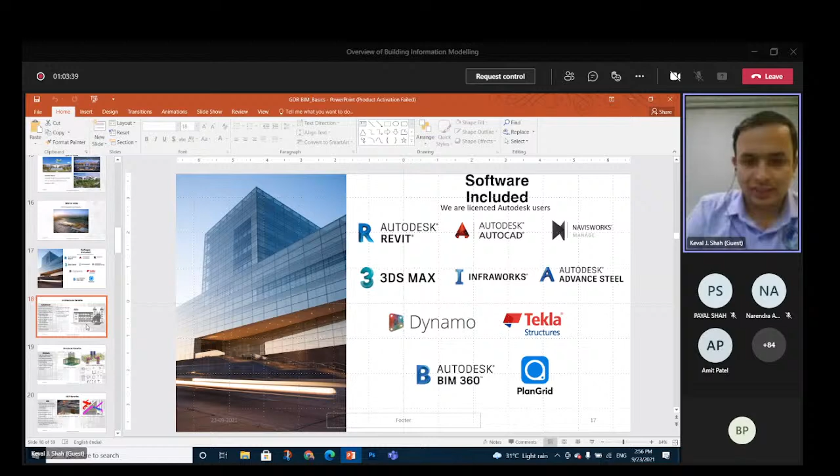Autodesk Revit is based - we cannot say it's the best, but we are using it. There are so many other softwares also, like Vectorworks is there, like Graphisoft ArchiCAD is there, we have now BricsCAD is there. There are so many softwares that are available cheaper than Revit, but we are using Revit currently.

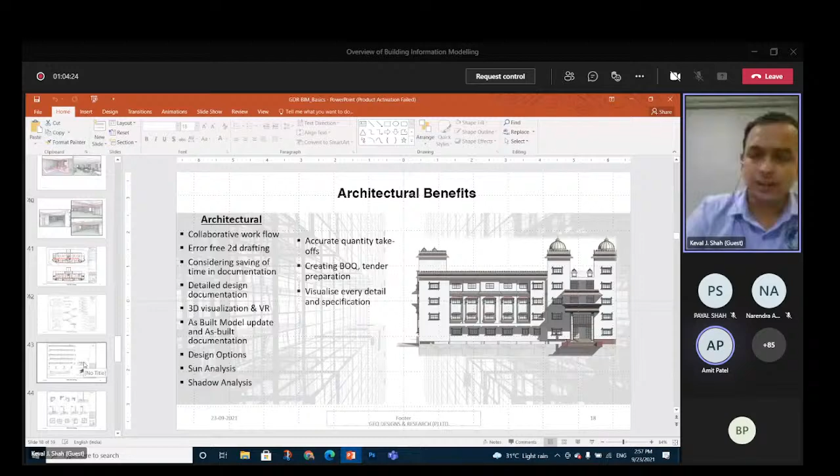So sir, is it possible for students to come there and learn software in internship? Yeah, definitely, we are providing internships. They want to come for internship for project work, but definitely I am focusing on final year projects. Do your final year project with us, I will provide you internship like this. Okay, sir, thank you, sir.

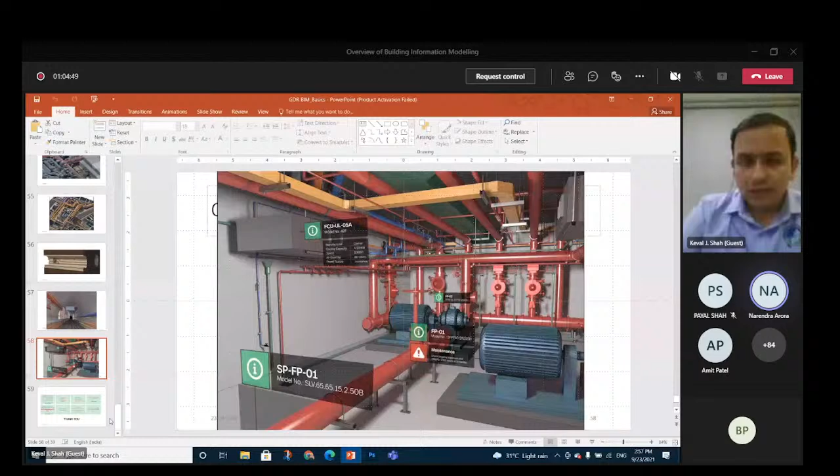Final year students now have internships instead of projects. If some students want to contact you, will that be okay? That will be fine. Because they will be looking for live projects rather than just learning AutoCAD or any CAD software, which has got no meaning otherwise.